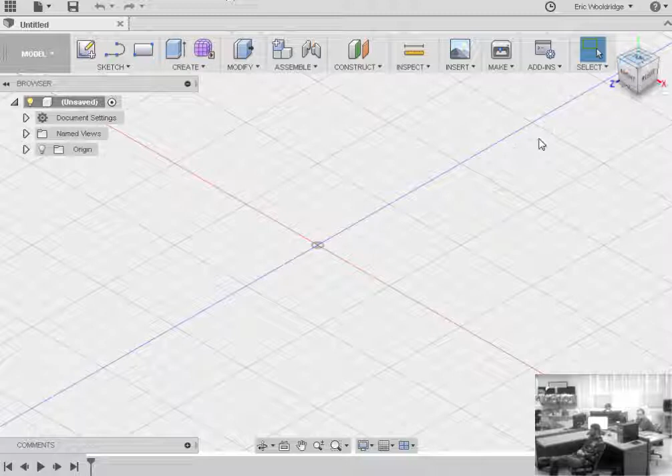Okay, so a quiz like this is open-ended. It's about your imagination and just figuring something out. So overall, the objective is creating a novelty item to make people interested, to give out.

Let's say you're working for Discovery Channel and running a booth, and you want to have these keychains out there. People pick them up because they're interesting, they're free, and they're inexpensive for you to make because you can just print them.

So let's say I'm going to actually make one of these keychains myself. I won't worry a lot about the design - you all can come up with the design - but let's just talk about technique. Let's say I've got the idea in my head of what I'm going to use.

So what's my first step in Fusion to make this happen? What do I start with? What's the first thing you do in Fusion to start making something? All right, you got to do a sketch, right?

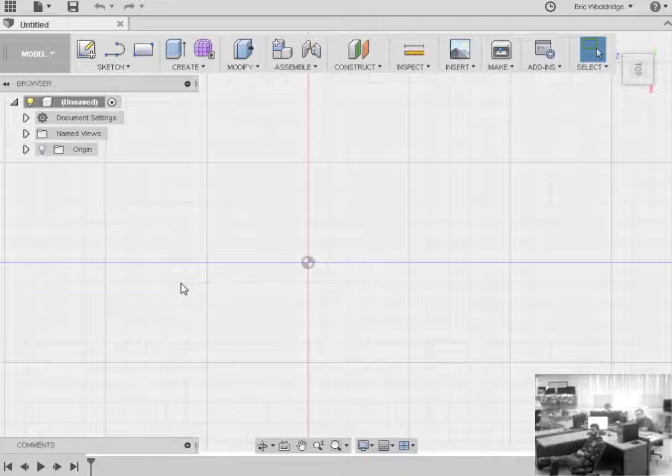You got to start with your sketch. So I hit my sketch tool, set to create. I select my plane I'm going to draw on. How big can the shark be, or the device be? 60 to 80 millimeters.

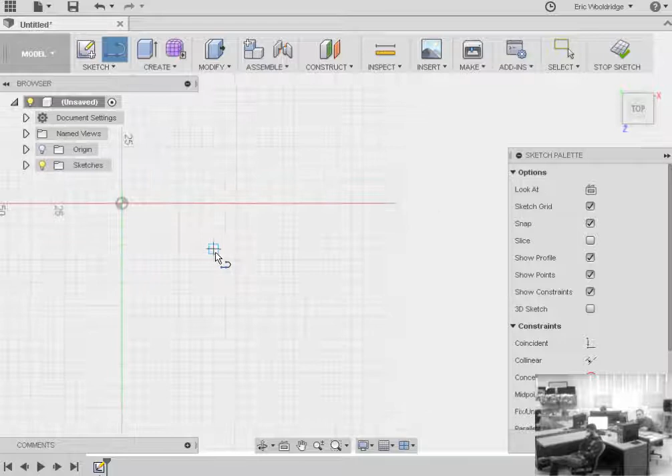So I'm looking at the grid here. Here's 50, here's 100, here's 60, there's 80, that kind of thing. So I'm going to zoom in a little bit, and let's say about right there.

And I'm going to start off, and let's just say I make a little shark pattern. Nothing fancy for the time being. There it is.

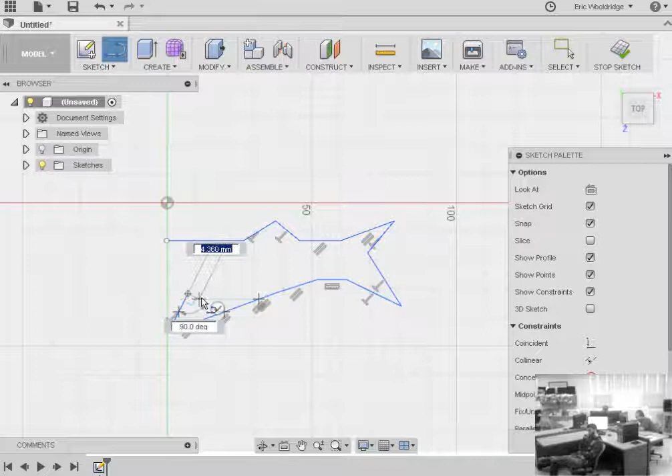And you'll notice it's throwing dimensions on. Are the dimensions that big of a deal for me in this phase? Not really, because I'm just designing something to size. And that's a horrible shark mouth, but that's okay for right now.

Okay? And I could tweak, and I can pull, and I can stretch these features. So, for example, I can grab this after I draw it and start adjusting shapes.

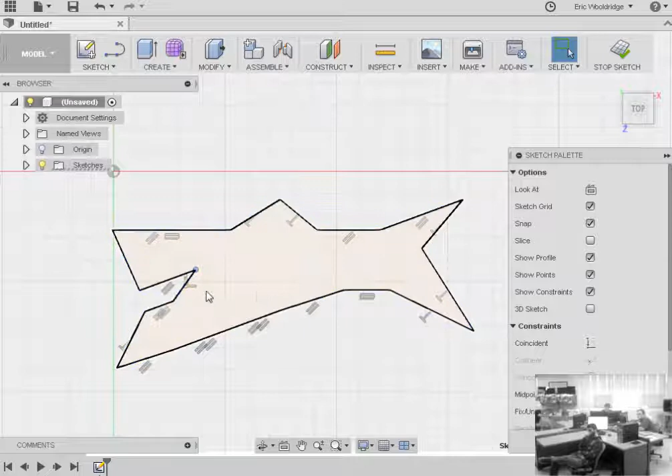Now, by the way, when Fusion does all these little double lines here, a little edge here, a little T shape here, what do these mean? Anybody know what those things are? What do these double little arrows mean? Any guesses?

Well, remember the term for this stuff is parametric modeling. Parametric modeling means it's based on features, and Fusion is trying to predict what you are prioritizing. So what it's saying is, okay, I'm going to assume that he's trying to draw this line parallel to this line. I'm going to assume that he's trying to do something perpendicular to something else.

See how this is like a 90 degree? I didn't really draw it at 90 degrees - it assumed that and helped me out. So these are constraints that it is adding in to actually sort of assist me.

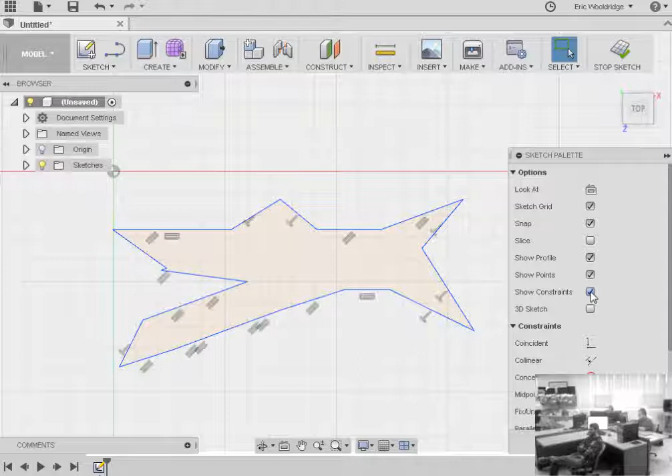Now, I may not want constraints on, but for right now it's okay - we're kind of getting started with this stuff. But that's what all those little icons mean. It's trying to interpret what you're doing.

Pretty simple process - we'll talk a little bit more about what those are, but just be aware when you see these things, it's trying to help you by assuming what you're trying to do. Remember, this is software designed for part making, not necessarily graphics, so it's trying to make things very structured for it. Anyway, there's my sketch.

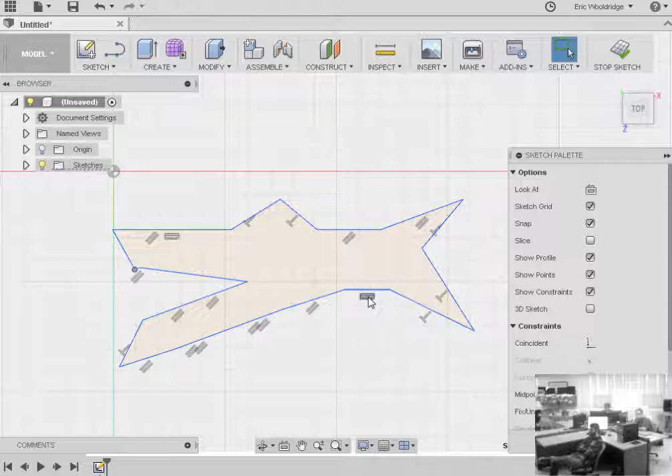How about some eyeballs? I'll throw in a nice little circle here - let's see, hit this again, circle, 2-point circle will work. I'll go there to there. There's a creepy looking eye.

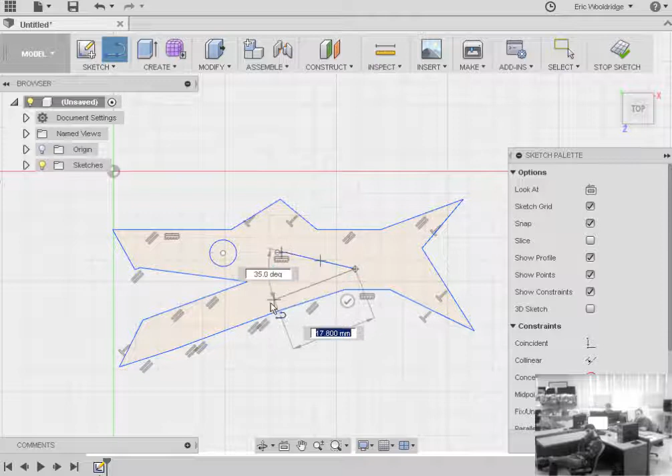How about a fin shape of some type? This is so bad, it really is. Okay, so there we go. And my sketch is done.

Except for, in fact, I need a keychain hole, right? So what size? I probably need to go back in here and double click to reactivate that sketch. Now, what size hole did I say you had to make the keychain hole? 4 to 5.

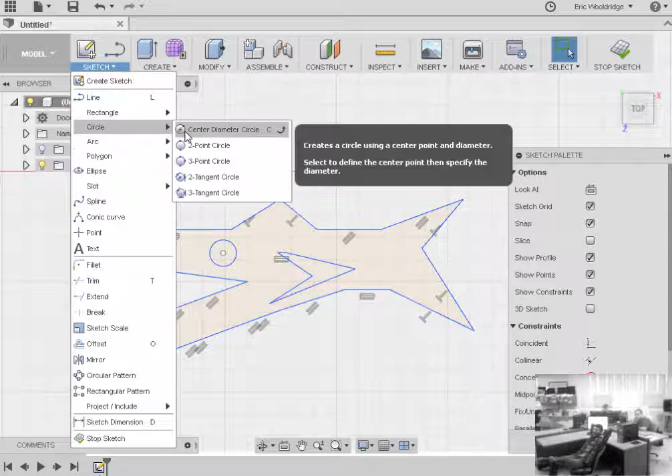All right, so center diameter right here is a good spot for the keychain. It's at 5 - I'll just type in 5, hit enter. And there we go. And now my part's ready to finish the sketch and hit the extrude button.

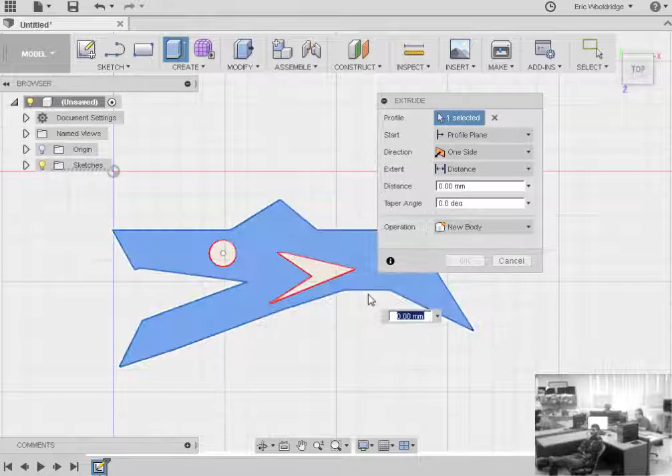Okay, so technique-wise, I'm okay so far. Click inside my zone. Something's not working. Well, actually it is, it did get it - I didn't think it was going to make it, but I must have closed it.

Whenever you don't see like a nice blue when you hit extrude and select the zone, that means you probably have a little edge that's opened up. Anyway, this is my really bad shark.

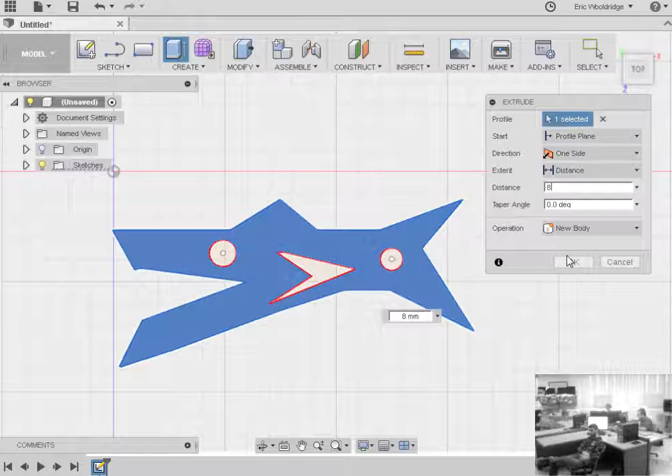How tall do we want to make it? How thick? No more than 10. No more than 10, so let's go 8. That sounds good. Hit OK. And there is our very creepy looking shark keychain.

Now, in the requirements, you're also supposed to add in something to help people understand what this is, especially in my case where it's like an abstract shark. So what would you suggest I do? Add some text perhaps to get people's attention?

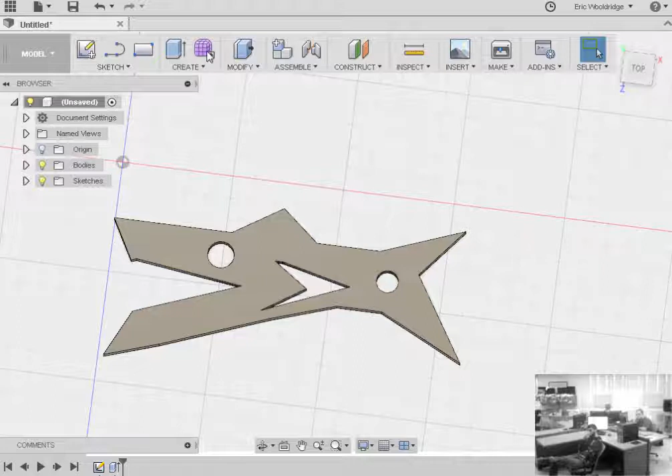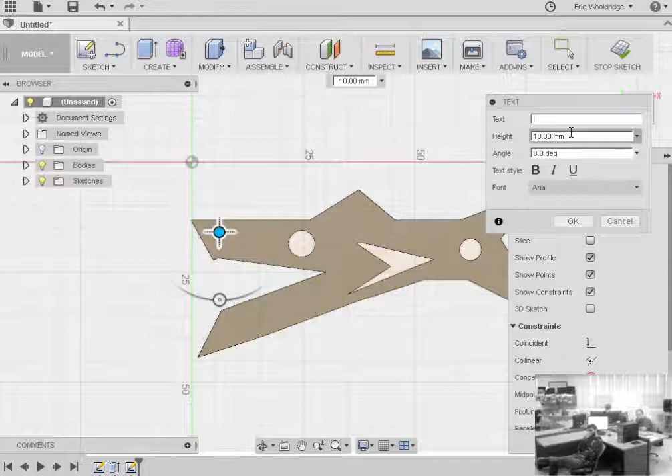All right, so I'll get a new sketch and place it on the surface of this one. I click that surface, and let's see what we can create here. Now I could go through and add lines to actually draw out Shark Week, or I could just use the text tool and place the text. Now, my problem is I didn't give myself enough space, so we're probably going to have an issue with this. And it's upside down. Awesome.

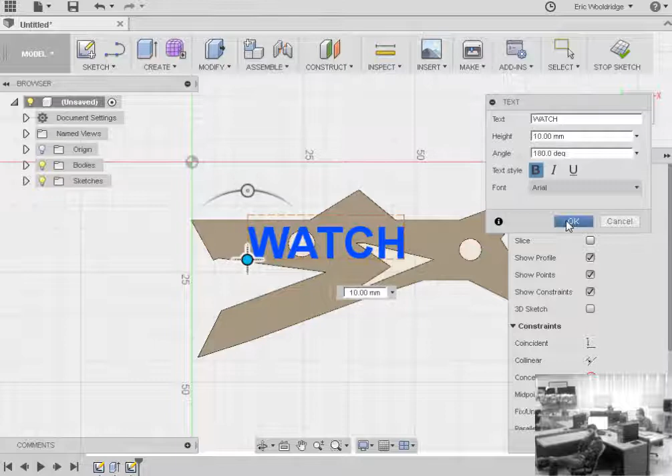So let's see if I can do a 180 on that. There we go. Watch, and we can bold it, and we can probably place it a little bit better. And that's just horrid looking, but you get the idea. And that sketch is now done.

So what do we do to make this text become a real object? What do we hit? Your extrude, or you go to your create tool here, hit extrude, select. You got to watch out for selecting the right thing, and I don't know if I hit it or not. Let's find out. No, I got it.

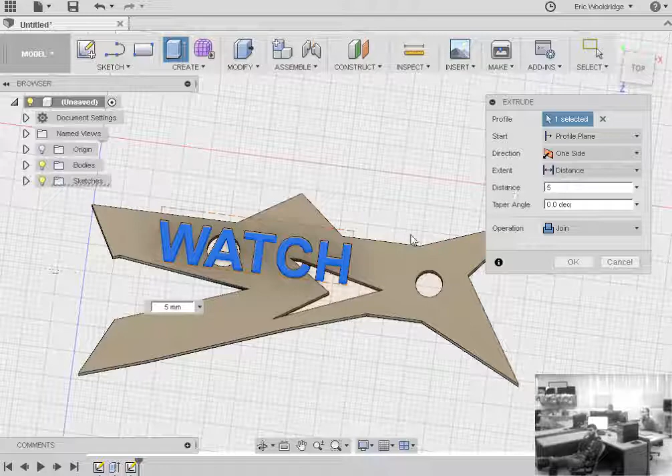All right, what height do you want on my extrusion of my text? What would you suggest? 5 could do it. I kind of like this 2, 3-ish here. You kind of sometimes want to be proportional. Maybe 3 looks good. And I hit OK.

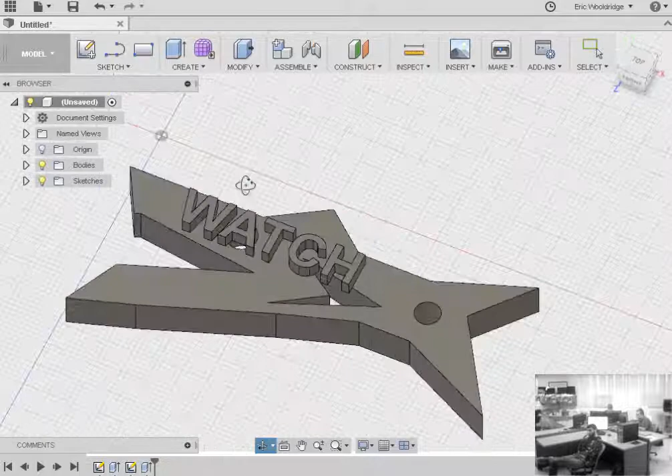And now my shark has this weird watch tattoo engraved on top of it. And this would not be a good printing example because this H is hanging out over top of nothing when it was printing it up. So not a good example of design, but of technique. That's what you're doing: it's a sketch, it's an extrude, it's another sketch on another surface, it's an extrude, and it's kind of pulling it together.

Now, if I realize this whole triangle thing going on here, this horrible attempt at a side fin is not going to work for me, what can I do? Do I have to start all the way over? Or what can I do to fix this problem?

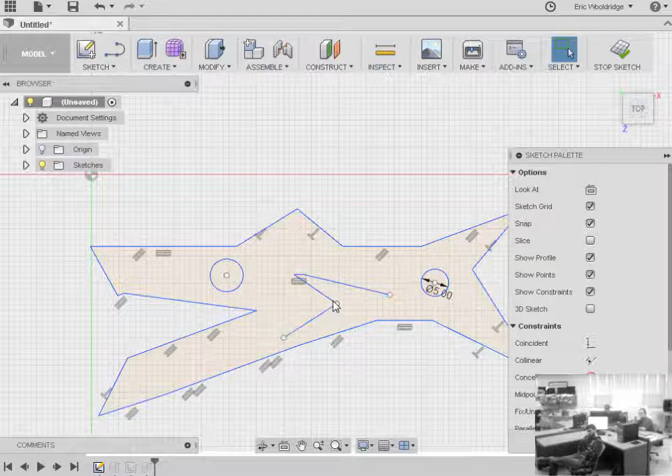Okay, bottom left corner, we've got this little timeline here of creations, right? I can double click on this sketch 1. It takes me back in the sketch menu, and I just delete this whole triangle thing. Now here's the cool thing, I don't even have to delete all the lines if I want to. I can leave the lines. As long as they're not closed, they can no longer be extruded. I hit stop sketch, and now that little hole is no longer there.

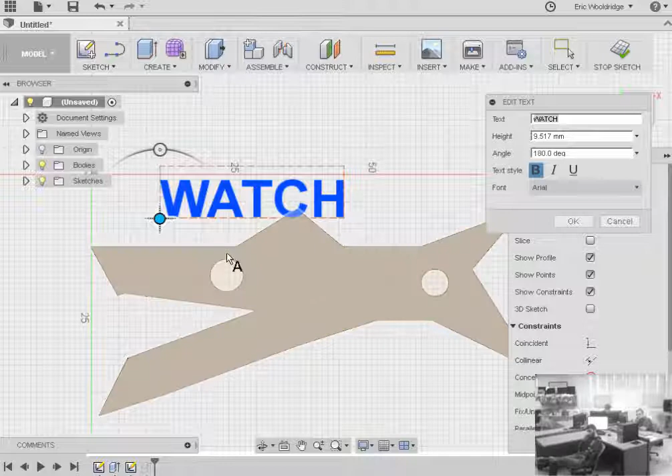The watch probably needs to be better positioned, so I'm going to go into this sketch and edit it, and I'm just going to grab my watch, if I can here, and I'm going to try. Come on, buddy. All right, stand by, I double click a few more times to get the watch into a better position.

Let's say I don't want it to overhang that, right? So I'm going to change the watch height down. We're going to take it down to 8, maybe 8.5, gets it right on that edge, maybe 8.8. Hit OK.

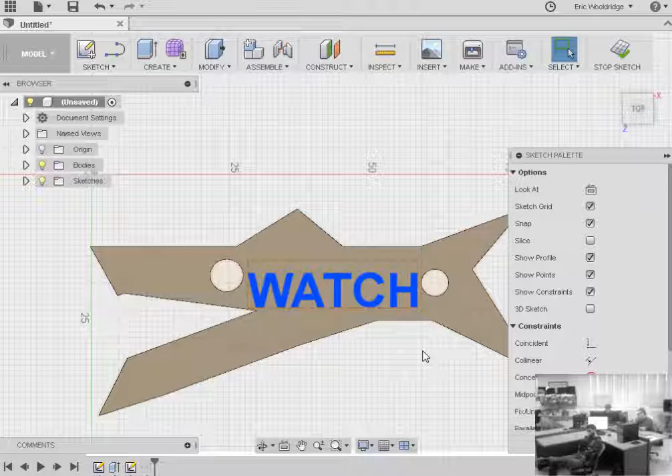Now I haven't recreated a new piece of text, all I have done is simply modify the original text there. I'm stopping that sketch, and now the watch has been adjusted to match up. Okay? So that's a quick example of a technique like this. It's all in your planning and realizing you can go back and edit your sketches.

Now your timelines will typically look this format: you've got a sketch, you've got an extrusion, you've got a sketch, you've got an extrusion. And that pattern, of course, you can always drag this thing back to kind of see your creation process. But this right down here is where you go to make changes and see what you need to change.

Now if I wanted to, I could fancy it up just a little bit more. I could go through and modify with some fillets. I could round some edges here, round this edge, say 2 maybe, smooth things out. And I've got a slight improvement. Maybe I could do something about that weird mouth with a fillet.

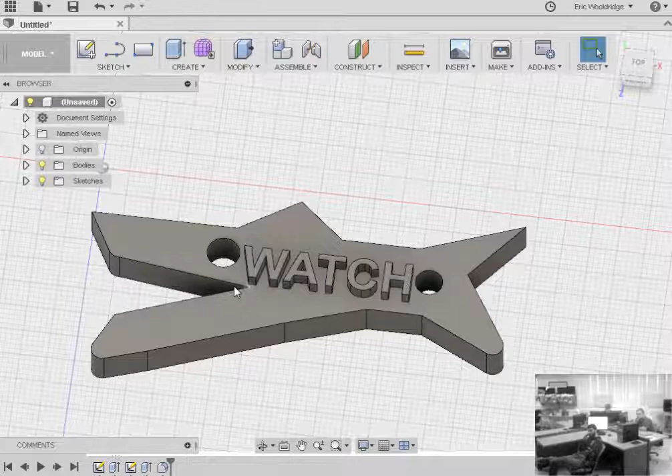Orbiting around. You'll notice that I do a lot of orbiting. That's really crucial for this stuff. You always want to get close to your work.

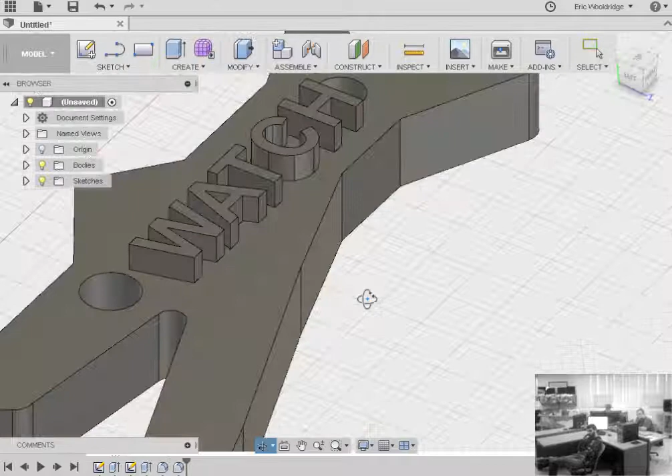Let's change this to maybe an 8. Ooh, not that big. How about a 2? 1.5. There we go. Slightly better mouth. And there's my creation.

At this point in time, if I was going to turn it in, I might want to do a screen capture right now and put the image where it needs to go. Again, how do I do a screen capture? Snipping tool. Go find your snipping tool on your computer. You can always search for it. Make a snip around your object.

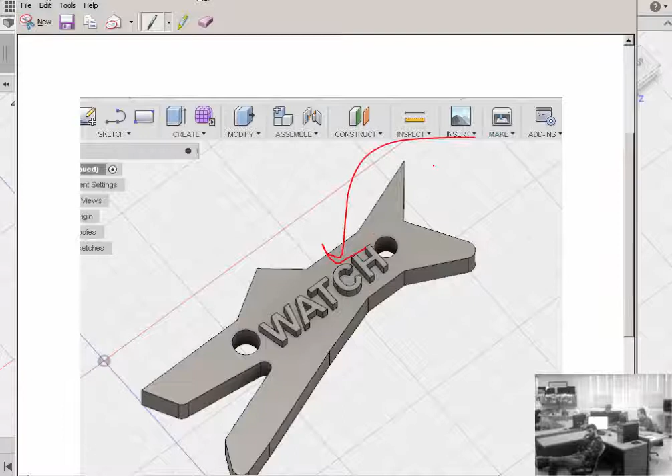Let's say you want to draw some attention to something and say this is important. So I say, bam, this is important. Horrible cursive writing with my mouse, but then I could actually put that into a Word file or whatever, submit it in whatever format I wanted to. But that's your basic technique for stuff like this.

Questions on this particular little quiz you want to ask? It's all in procedure. Parametric modeling is all about procedure, step by step. So just keep that in mind.

All right. Say that you really love this design, so you want to do your export, and that's a pretty easy process. No, I didn't mean to hit that button. Hang on. Close that down. There we go.

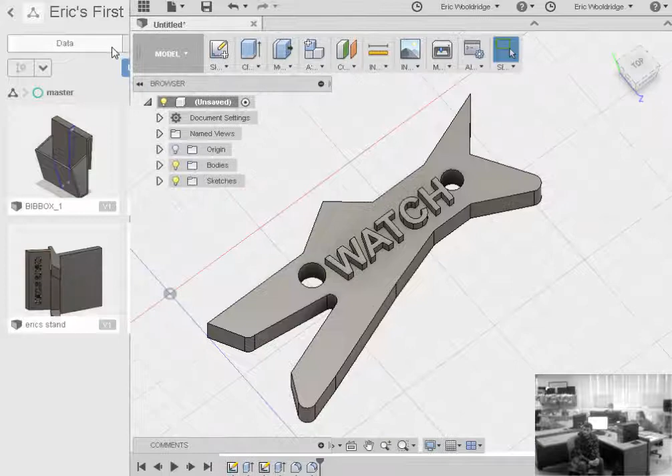So go down here. I'm going to go to, I've got a choice of export, which is really a little bit more geared towards CNC manufacturing and other types of transfers. It will work, but it's not the best way. 3D print, but you've got to watch your settings on the 3D print. You're not actually going to 3D print it, you're just trying to get the STL file out to 3D print.

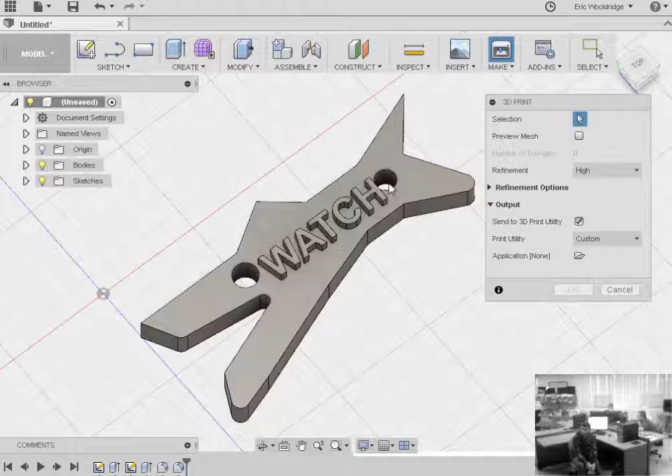So with that in mind, you go through this. Here's my selection. Yep, that's what I want to do. I don't really care about preview mesh. Refinement, that's fine if it wants to be high. With a simple part like that, that refinement's not going to eat up data.

My output, I don't want it to send it to 3D printing utility. I don't have that hooked to a printer, so I uncheck that. So what it's going to do by unchecking that, now it knows I need to create a file, not try to send data somewhere through a cable and turn it on a printer.

So I've got my selection, got my refinement, not too concerned about the refinement options, although you can hit it and make some changes, but it's not a big deal right now. Got that unchecked, and I hit OK. It pops up, says where you want to save it to, so I'll call it ENW Shark 1, hit save.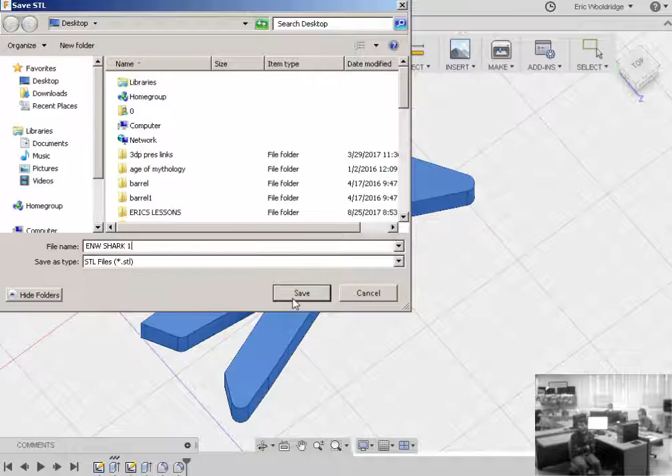There it is on the screen. This is the STL file. That's what I would actually save to like a thumb drive or email to myself or whatever the case may be to get it to my slicing software and the printer. But there's more steps coming with that.

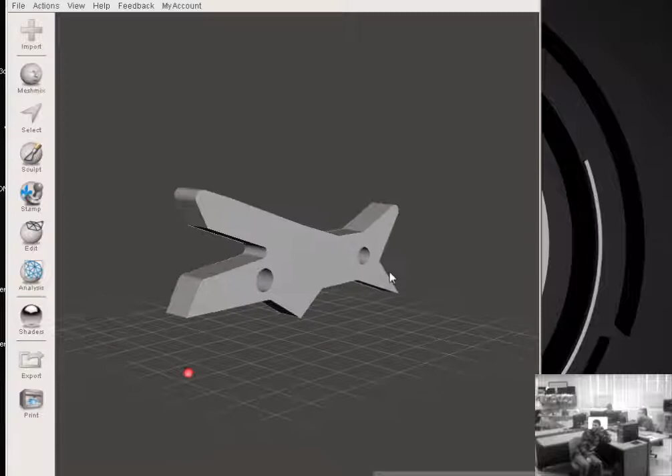I'm loading it up so you can see it. There is a mesh version of my model. So that is the STL file. Notice that I'm no longer in Fusion. This STL file was opened by Meshmixer. And there's other programs that can open STL files, but it's basically a done design.

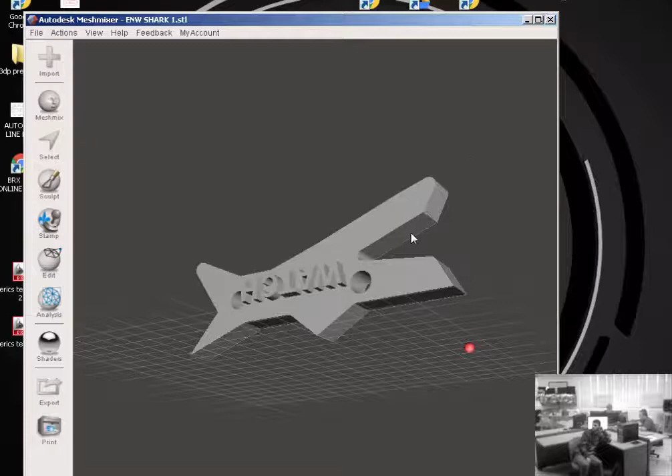I don't do a lot of modification at this point. If I wanted to modify my shark, I would go back into Fusion and make my changes. But that's the procedure. You just go to your down arrow next to your tab or file here, your sheet, 3D print, make sure it's turned off where it says send to 3D print utility, select your object of course.

And you can do the preview if you want to. But hit OK, and then it gives you that option to save the file. And that's how you would actually get the STL file out and walk it to a printer or send it to a printer to start printing.

Questions? All right, fairly straightforward process. Not a lot of things go wrong. You can show the preview. That just gives you an idea of how it's going to mesh it up. But it doesn't really matter a whole lot as long as the mesh is created.